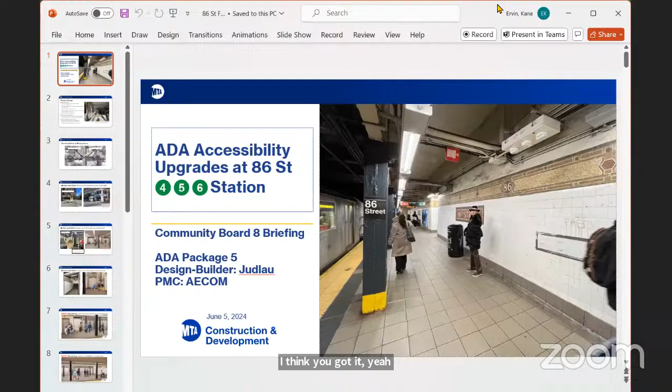Okay, can people see that? Oh, wait, sorry. Kana, if you want to email it to me, or if one of your other team members wants to share it, we can do that as well. Okay, I think that I got it this time. I think you got it. Yeah. Suffer from having too many things open at once, just my usual problem. Okay.

Okay, can you see the full presentation? Yes. Okay, great, wonderful, thank you so much for your time. Sorry about the tech problems.

Hello, my name is Kana Ervin. Thank you so much, Katerina, for the introduction, and thank you, everyone, for your time. I'm here representing MTA Construction and Development. We're very excited to come here with updates and a presentation about 86th Street.

This is a station in the ADA Package 5. This is the largest design build package that the MTA has awarded to date. We awarded this in December, and this builds on the success of our very first design build package of ADA upgrades that we completed earlier this year.

So we're at 4 stations and counting for this year, at 151 accessible stations. So the MTA is well on its way to meet our accessibility goals.

Just for some context, this station does have an elevator, but it is not yet fully accessible. So we're going to be doing a myriad of ADA improvements, as well as some other improvements here to bring this up to code and just make it an overall better station environment.

So we have to dive into the project scope. The ADA improvements include 1 new street to upper platform elevator serving the southbound platform. And we're also going to be installing 2 new upper to lower platform elevators serving both directions.

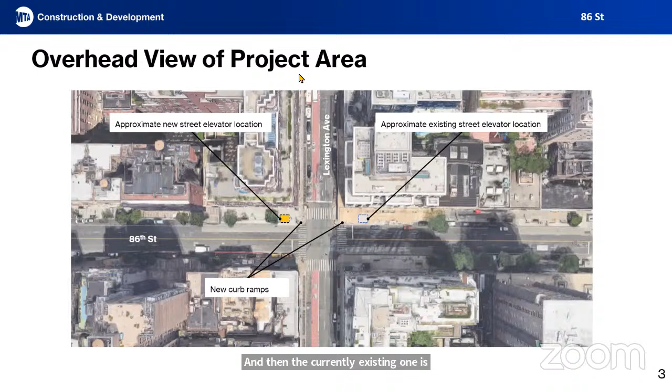We're just going to flip through some before and after photos, some nice renderings we have from the project team. So this is the street level. This is northwest corner of Lex and 86th. We have our landmark Best Buy here. That makes it easy to visualize where the elevator is going to be landing.

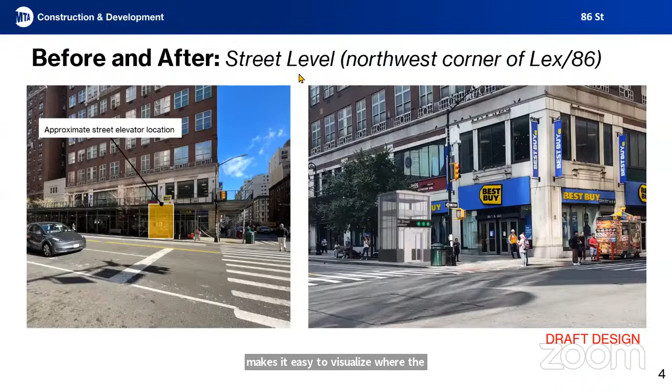And then we have this before and after view of the upper level. So this is the southbound direction. On the left-hand side, you can see that's one of those double staircases I was talking about. So that will be removed and reconstructed around the elevator. You can see how we're going to be doing that on the photo to the right.

We're going to be keeping the OMNY machines. We're just going to be shifting them a little bit. Again, these are renderings or draft designs, so if you don't see them in the photo, it doesn't mean I'm not going to be including those.

To the left, you can see that's where the approximate landing of the street to upper level elevator will be. And on the right, right where that man is coming from, that is where the station entrance is.

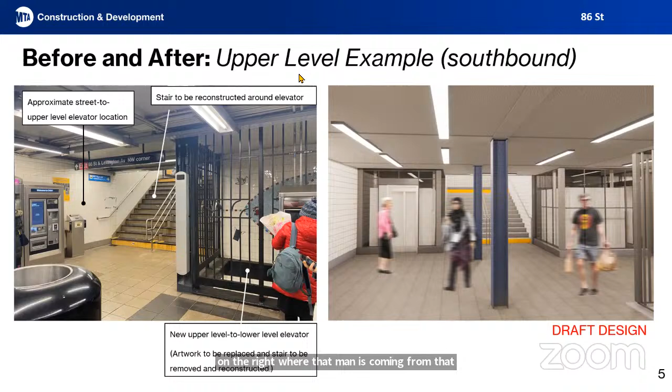Some more renderings. This is showing the lower level, and this mosaic banding is the historic feature I was talking about. So we're going to preserve that.

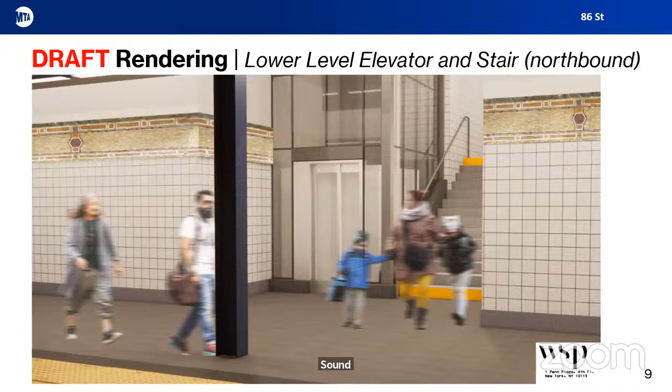This is the elevator and the stair northbound. And we have the southbound lower level elevator and stair.

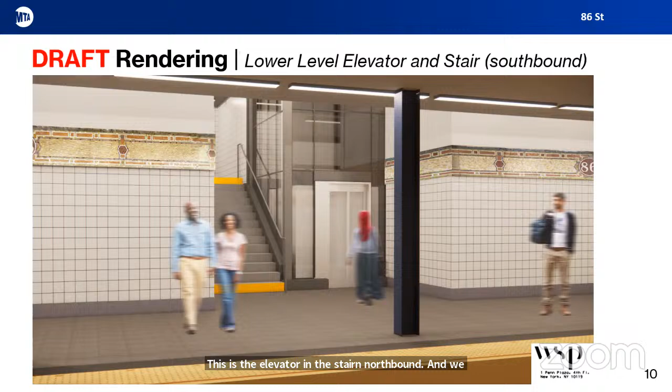Okay, so to go into the construction timeline, now that we've seen some photos of what it will look like, currently we're in the phase of doing outreach, making sure stakeholders are kept aware, coordinating with utility companies and with all the different agencies we work closely with at the city, DOT especially, and other agencies as needed.

This will be throughout the entire lifetime of the project. We are constantly coordinating with these different entities. The earliest we could be mobilizing is mid-June, but I'm going to address some asterisks on the slide and talk about why these dates are approximate.

The first visible signs of construction you might see are the barriers we install that maintain and protect traffic - we call them MPT. They surround the work zone, and then we set up a staging area, which is the construction equipment we'll be placing there to support the project.

After we put up those barriers, we're going to commence with the utility work, excavation, demo, and other construction work. That will continue from right after we install the barriers until the end of the project, which is slated to be substantially complete in Q4 2026.

To address these dates - this is the earliest we think we would do this. We wanted to come to you even though these dates are approximate and we think they might move a little bit. The reason we don't have them set in stone yet goes back to that first slide I was talking about, this being a design build package.

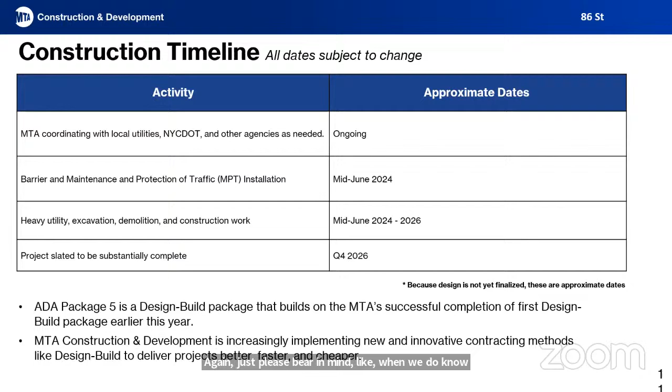We will come to you when we have more concrete dates. Later in this presentation, when we talk about some of the service disruptions, please bear in mind that when we know the exact weekends affected, we will let everyone know. We just wanted to err on the side of caution and let you know the very soonest we could do this, and to start the communication on this project.

So now we're going to dive into the phases of MPT that I was talking about on the earlier slide. This is the first one - supporting utility relocation, some station modifications, and this phase is for the southbound elevator installation and the platform extension that accompanies the elevator.

Because of that realignment, we'll have to temporarily remove the taxi stand - just for this phase. However, the M86 bus stop will be maintained, as well as all the pedestrian ramps and walkways at all times.

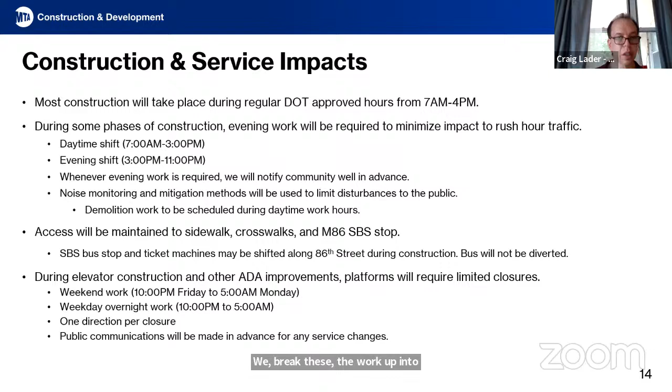We break the work up into shifts. If there is work that can be noisier, because we do have some excavation as we're going to be punching up through the station, and the Manhattan schist is one of the strongest rocks on Earth apparently - I just learned that at a construction site - we always make sure to stack some of the noisier work during the daytime, and we have a bunch of mitigations to reduce the noise.

We can use sound blankets, we use enclosures in some cases, but that still needs to be finalized. When we have the design, we'll let everyone know what our exact plan is. I know that is going to be very important, especially to this neighborhood, very residential, of course.

The evening shift, that's 3 to 11, is most commonly used to prepare for the next day. That means cleanup, any sort of prep work, but we are not going to be doing any sort of rock demo during the nighttime.

Again, that access will be maintained to the sidewalk, crosswalks, and the bus stops. We may have to shift the ticket machines in the bus stops just a little bit on 86th Street during construction. We're still in contact with New York City Transit and our bus division there. It won't be diverted, it won't be skipped, but we are still in discussion with them. And of course, we wanted to give you that heads up in case we do have to do that.

So during the construction of the elevator, and specifically the platform level improvements I was talking about, most notably the ADA raised boarding areas and the platform tactile edge yellow strips, those will require some limited platform closures, and we do one direction at a time, because we're never going to be shutting down the station fully during construction at all.

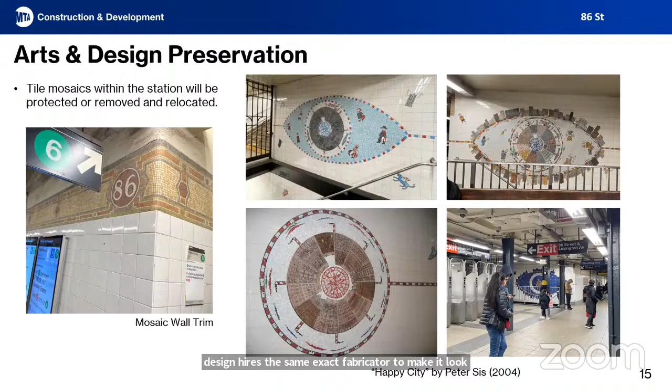We work very closely, I facilitate conversations with the arts and design team at the MTA, and Katerina, and we also loop in the contractor. They work hand in hand with arts and design to make sure that these beautiful artworks, which will be disturbed in some capacity, especially that blue eye we see in one of the renderings that will be moved to make way for one of the elevator banks, will be refabricated. Most commonly, arts and design hires the same exact fabricator to make it look exactly the same, and we will be relocating it somewhere in the mezzanine. That goes for all the artwork that will be disturbed.

And finally, we have our project team contacts. You all know and love Katerina, of course, and again, my name is Kana Ervin. There are some familiar faces on this Zoom, I see Michelle and Will, so hello, and you have my contact information. We also have Deborah House, and we have folks from AECOM and Judlau on the call as well who can answer some technical questions.

Please feel free to take photos or screenshots of the hotline and the email. Please just note that the hotline is not for emergencies, but if any member of the public wants to call and ask questions, they can do so. If we don't get you in the moment, leave a voicemail and the PMC team will get back to you within about 24 hours during the week.

And that concludes our presentation. We can now open it up to questions. I will turn it back to Katerina.

Thank you so much, Kana, thank you for taking us through that. And thank you everyone again for your time and for giving us the time to present this to you. So we can start taking some questions. Let's start with Valerie. But hold it. Oh, sorry, go ahead, the questions, Katerina. Got it, you throw it back to us.

Okay, thank you for the presentation. First, we want to see if any members of the public would like to be heard on this, and I see Elaine Walsh. Why don't we unmute Elaine? And I'll remind everybody, if you'd like to ask a question or make a comment, go to the react icon on your device and look for the raise hand button so that Chuck can call on you.

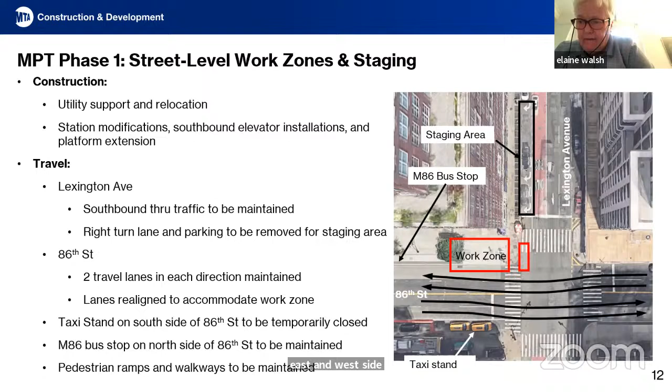The south side with the entrances, on both the east and west side of Lexington Avenue, we have subway entrances there. Are you going to renovate those? There's a lot of things we're doing. I think, Chris, I'll turn it over to you.

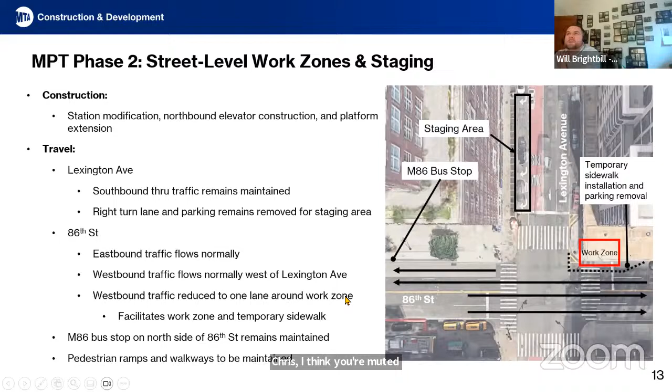Chris, I think you're muted. Chris is, there we go. Found him. Oh, okay, sorry, he's not labeled as anything other than just his name. Oh, Chris Alexander, yeah, sorry. Sorry about that, I was trying to unmute and it said I wasn't allowed to.

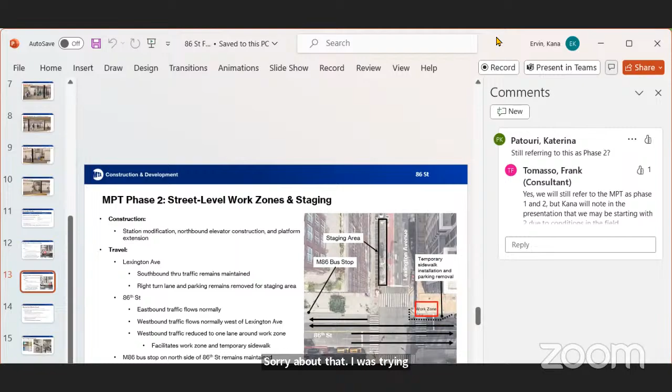Yep, there will be two staircases, I forget exactly which ones, that will be upgraded to ADA standards. So the rise and run of the treads will be renovated to ensure that they are at the proper ADA height, as well as the handrail elevation will also be modified to ensure that is per ADA code standards.

Okay, we also know that there's a lot of asbestos in the subway, and will you be doing the repainting of both the north side and the south side and retiling?

And yeah, you guys won't be able to unmute yourself once I unmute you and you mute yourself back, so just stay unmuted, sorry about that possibly. Can, sorry, I'm so used to muting and unmuting.

It's okay. We don't intend on impacting any locations that are not directly impacted by our construction. The painted surfaces are not asbestos containing, but they are lead containing, so we will have proper lead protection when that occurs. The MTA has done an extensive asbestos survey pre-bid, and we will be monitoring any locations where asbestos may be interrupted, so that the proper abatement takes place. The MTA has a third-party subcontractor who performs that work.

So we have addressed any areas that may be of concern, and we are working with the MTA C&D to ensure that those areas do get abated in advance and in the proper standards.

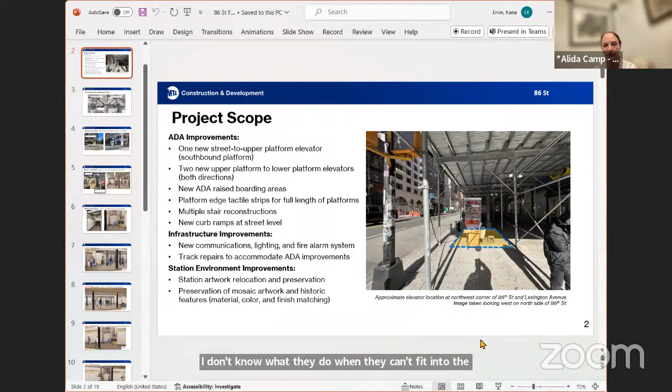Yeah, that's the problem - if you shift it 50 feet and you have all of those buses trying to use an even smaller space, it will cause problems with buses. I don't know what they do when they can't fit into the space, but there's timings for the jitneys, the express buses, and the regular MTA buses. So I'm just raising that because it can get really crowded there.

My last point is that the art by Peter Sis, one of my favorite children's book writers, is fantastic, as you pointed out. I'm glad it will be preserved and moved, but I would encourage the MTA, if possible, to consider other art. I know plenty of stations have a huge amount of art, and CB8 has an arts committee, so we're fully in support of public art in public spaces. That's all.

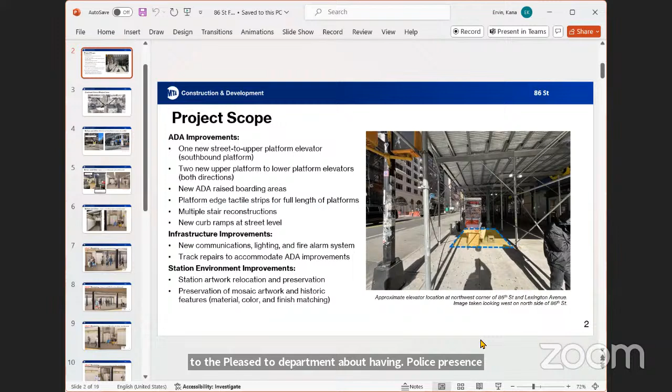So we do have regular liaisons that work with the NYPD to station officers throughout on platforms. I don't know if there's specific plans to have them here for construction. There are times that we specifically have NYPD officers on site at the street level to help with maintaining pedestrian safety, but there are NYPD liaisons and officers kind of going throughout the system regularly.

And second question - I worked on the 2nd Avenue subway with the MTA, and the elevators have been really maintained beautifully. 86th Street and Lexington Avenue gets a lot more traffic. How do you plan to maintain the cleanliness of the elevator?

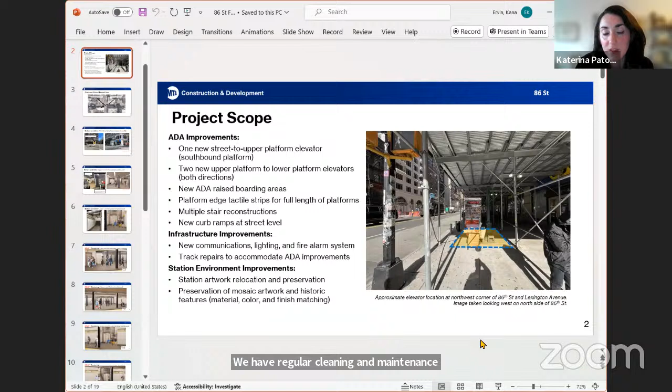Yeah, this is a high traffic station, as you know, it's important to our system. We have regular cleaning and maintenance schedules specific to the elevators in general and elevator cabs. Our station managers check those routinely, especially during the night shifts. That plan is regularly followed daily by supervisors and will be the same for these new elevators as well. We want to maintain all new infrastructure and existing infrastructure to make sure it can run for the whole length of its useful life - that's something our station managers take really seriously.

Thank you. Appreciate the 72nd Street kudos - I was actually on that project, I built it earlier in my career.

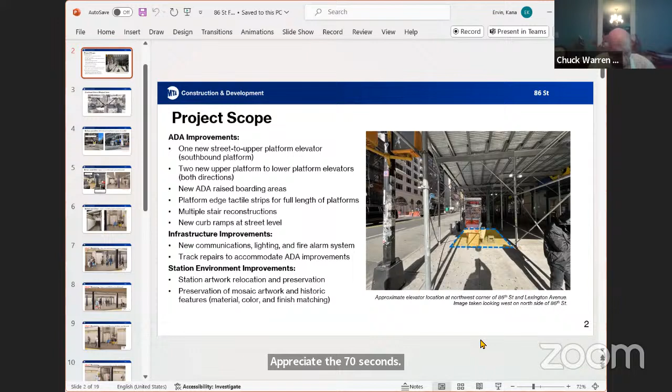And thank you, MTA. We're all in the area and everywhere really delighted that this is finally happening. It's very much needed, so thank you very much. A couple of questions about the construction.

Number one, at any time, will you need to actually break open the sidewalk or the street in order to move wires or whatever you might need to do?

Chris? Yeah, I'm not sure what the question is.

We have to modify the existing station infrastructure and provide a shaft from the mezzanine level to the street. There will be a need for excavation on both sides of the intersection to accommodate the structural steel and shaft modifications, so the elevator can travel from street to mezzanine level. Because you had that north side as a staging area, I'm differentiating between the sidewalk and the street.

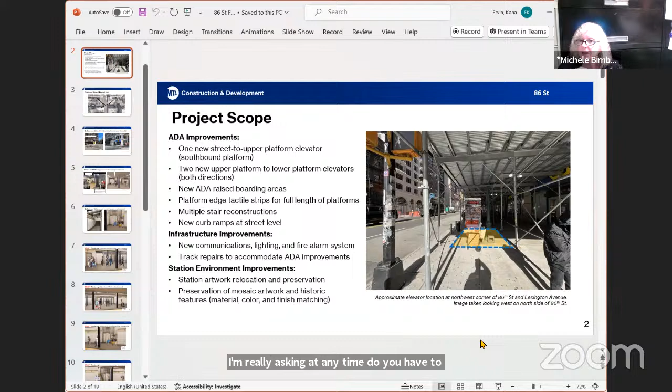If you're breaking up the street, will it be within that fenced off staging area? I'm really asking, at any time, do you have to close the westbound lanes? Could we go to that slide while we answer this? I saw how you made a little veer off in order to get around the staging area, so I'm asking if that's the extent of it, those two westbound arrows, so that the breaking of the street will be within your staging area and traffic will always be left open.

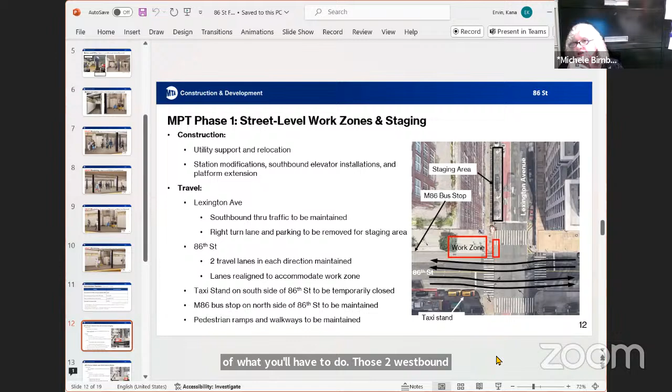During this phase, the two lanes in both directions are maintained throughout. In phase 2, the travel lane heading westbound will be narrowed down to one only through the intersection. Connor, if you can switch over to the next slide.

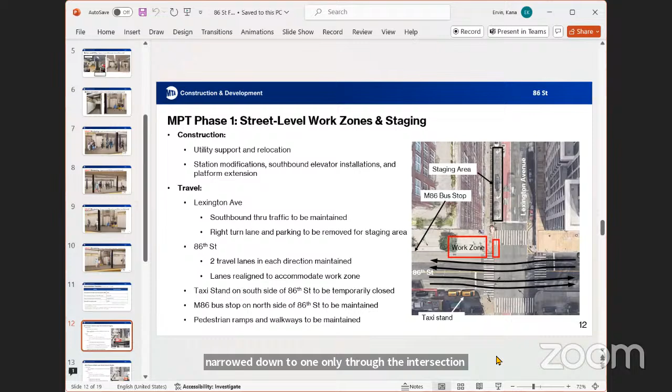To accommodate pedestrian flow and to ensure that the intersection and the sidewalk is maintained, the traffic heading west will be narrowed to one lane, but restored after the intersection.

So it'll only be one lane east of Lexington Avenue, and after you cross Lexington going west, it'll become two lanes again. But those lanes will curve or veer a bit to go around your work area, correct? Correct. There'll be a merge east of the work zone, within the block, and then the street will reopen back to two lanes of travel. So there will be a small bottleneck at this area, but only during the second stage.

Just to make sure this is clear in response to your question, the excavation is happening in the work zones and not in the staging area. That's correct. Yes, that is correct.

Now are you using jackhammers or blasting? How are you doing your demolition? No blasting - it's not a method that we're allowed to use, and it's not a method we want to use, especially close to so many residential and business areas.

The main methodology we're intending to use is rock drilling and splitting, with some jackhammering to break up loose debris. That is what we are currently looking into and what we plan to use. So essentially during the daytime hours, we would be drilling, splitting rock, and doing some light demolition to clear the Manhattan schist when needed or where needed.

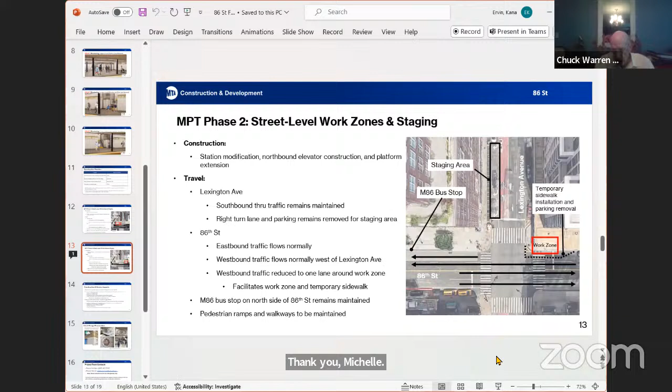Excellent. Thank you, Chuck, and a big thank you to the MTA for the presentation. Really appreciate it. The costs of these construction projects can be very large, and each dollar we spend on an individual project is a dollar we can't spend on another project somewhere else in the system. Is there anything you could do to reduce the cost of this project so that we can stretch our dollars further across the system? I mean, the project has already been awarded, but design build is the new innovative contracting method that construction and development is using, and it actually gets us a lot of elevators for a reduced cost rather than our traditional means of contracting. So this is in itself a cost containment measure.

Yeah, I think that's a good question. I don't know, Sebastian, if you caught the beginning where Kana broke down in more detail the nature of this design build package, but that's exactly why we're trying these new methods of contracting in order to meet that goal.

The other thing to add is that as we bid for these projects from the construction side, we compete against our competitors to provide the lowest price, finding alternate schemes to lower cost, saving on schedule, and mitigating other cost-impacting factors throughout the construction process. The bidding process itself is tedious for us, but it gets the best bang for the buck, and it also mitigates our exposure to change orders, where under the previous system, any errors would provide the contractor with additional change orders.

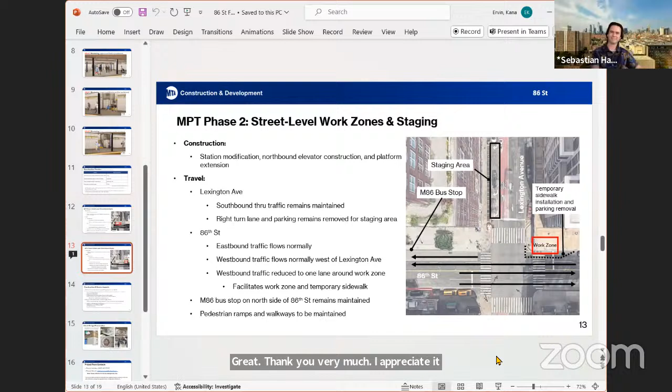Great, thank you very much. I appreciate it, thanks Sebastian. Right, Chuck, before we go to Rita, I would like to just chime in. Of course, anytime, all right.

I too would like to thank the MTA for this presentation. As you know, Community Board 8 had some very strong language in our resolutions when you came to us with the northbound local accessibility improvements back probably 8 years ago or so. We were all very frustrated that it was only on that single platform and that it wasn't being done comprehensively, so we're really happy to see our community board was hopefully influential in moving this project along and getting the MTA's attention that this should be and was a priority project. We'd like to thank you for that.

There was a comment made about the phasing in terms of when you may be able to start operating the elevators. To my original point, remember that original project was done so people would be able to access the northbound local platform only, and they would not be able to return to the subway. So along those same lines, I think the sooner we're able to get any elevators in place, the better, even if it means providing full accessibility on the northbound side before anything happens on the southbound side, or only getting local access on the southbound side before connecting to the express platform. I think that should be a priority, and I would again ask if that could be considered.

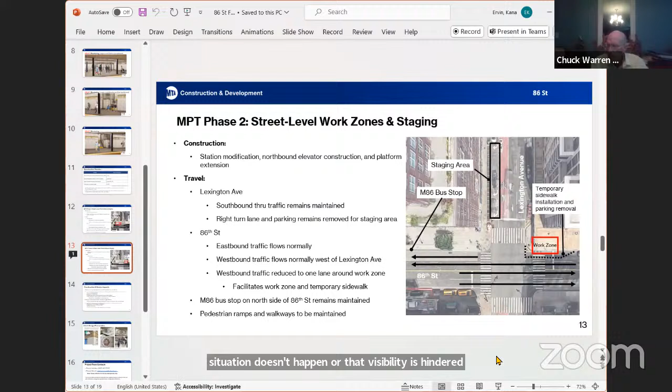Okay, I'm glad to hear that. Again, I would still request that you look into possibly moving it back as well to provide that additional visibility, but I am pleased to hear that you do have those precautions being taken and that is now hopefully part of your standard process for these. I just want to go back to that again, the same location.

Given the situation, I don't know if there's any consideration that could be given to perhaps eliminating the right turn lane temporarily from southbound Lexington onto 86th Street, for the purposes of preventing potential interactions with pedestrians, especially when you have a staging area over there. So I'd like to put that in as something to consider as well.

We're still coordinating and working with DOT. Just because the staging area is currently in that lane doesn't mean that DOT will cancel the turning lane. The turning lane may be shifted into the bus-only lane at the time, but we're still working with the MTA and DOT to finalize that intersection configuration.

Yeah, and at least in my opinion, I would not like to see the bus lane compromised. If we could then go back to the question of pedestrian access.

So you had mentioned that the southbound staircase will need to be closed for a period of time during the construction. Are you referring to the entrance on Lexington Avenue, the entrance on 86th Street, or both?

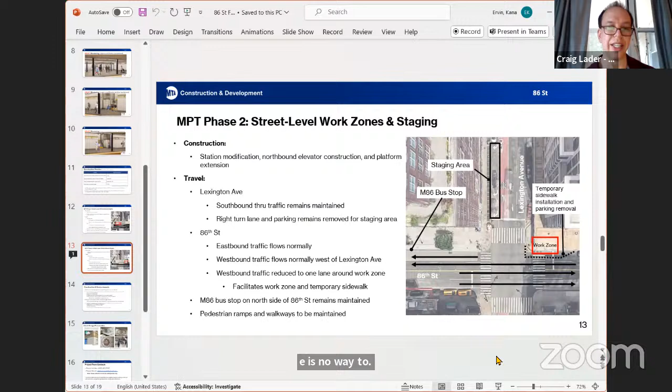All right, and there is no way to allow for the Lexington portion of it to remain active?

Unfortunately, if you go back earlier in the presentation where the schematics were shared, that existing staircase is actually being shifted over, so that wall is... Oh, okay. The elevator actually goes through half the stair, but the stair width is maintained, so the entire stair shifts over. So there's actually quite a bit of structural reframing required to maintain that width of staircase, but also provide access and the elevator. This is actually the slide.

That elevator is about 10 feet wide, so it eats up about half of that existing staircase. So the wall where the artwork is, which is going to be relocated and moved over, has to be reconstructed to accommodate the elevator-staircase combo.

Okay, no, that makes sense. Again, I would go back to the concerns that were raised about maintaining crowd control, because if the southbound access is only going to be on the south side of 86th Street, that's a single staircase similar to what you're showing there, so essentially capacity is going to be reduced by half, and it already does get crowded at times.

So I would hope that there is strong crowd control. There is strong crowd control that is in place.

Same thing, just to make sure I understand, the internal staircases as well, I assume those are going to have to be closed while the elevators between the local and express platforms are installed, correct?

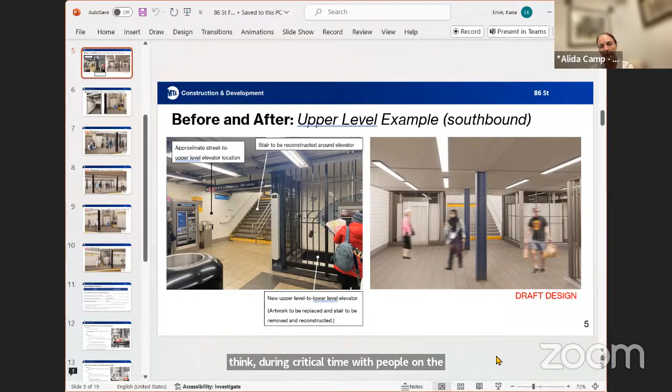I did. I just wanted to reiterate, and please forgive me for taking up the time, the idea of crowd control. I use that station at rush hour, I use it on the weekends, and it is always crowded with all the assortments of things that people have, plus all of the people with the crosstown buses, express buses, and limited buses. I don't know if you're planning to have cameras or MTA officials there, but we really need some help during critical times with people on the staircases. There's not a lot of room for people going both up and down, both internally and up to the street level, as well as the platforms. That's all, thank you very much for letting me speak on that point.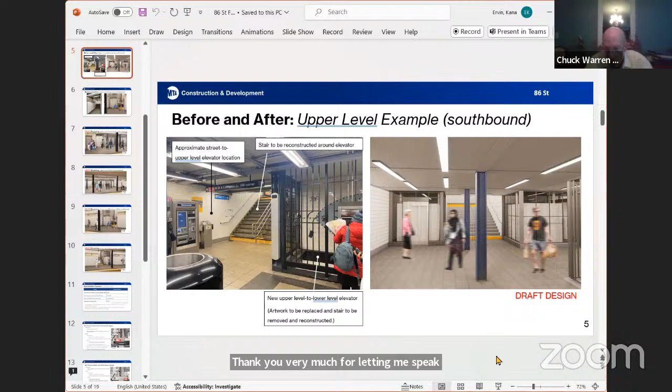Thanks, Alita. Just to note that we're going to take these notes back in terms of how we're managing crowds and wayfinding and all of that. We have our stations team and operations team studying these things very closely, so we're going to take all of this feedback back to them. Thank you everyone for your time and for all of your helpful questions and comments on this.

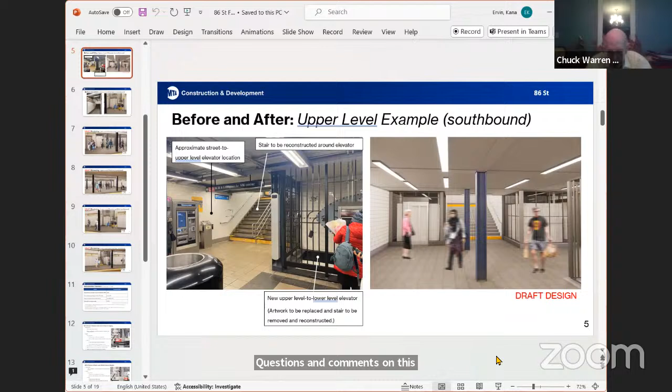I appreciate it. Okay, so why don't we take a vote on this?

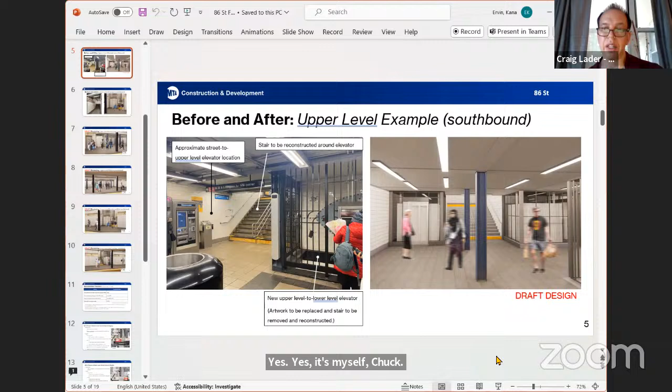Let me just read the roll, Craig, to see who's here. Yes, so we have everybody: myself, Chuck, Alita, Barbara, Gail, John McClement, Lori, Michelle, Paul, Rita, Sebastian, Valerie. Did I miss anyone who is a member of CB8?

Okay, so if you want to vote yes, you don't have to do anything. If you want to vote no or abstain or not voting for cause, please raise your hand. I don't see anyone, do you see anyone? So I think that's unanimous, and we thank the MTA.

And I know this is something, as Craig said, that we wanted to see happen for a long time, and it's great to see it being implemented on a reasonable schedule. I think we have, if the MTA folks can stay on, we could—because item 4, Craig mentioned before, it was a continued discussion on the proposed 96th Street bus lane, and we had some discussion of it before, and I think we're going to have further discussion here. Craig, did you want to speed that up a little bit?

Yes, and from the MTA side, New York City Transit, I don't think everyone is needed. I think Katerina, you may want to stick around for this. And Colleen, I know that you were the one who reached out and said that there was a request for a resolution in regards to the 96th Street bus lane improvement project. So I just want to revisit that discussion so we could hopefully come to a conclusion of it. I don't know, Katerina or Colleen, if you want to comment on anything involving that process, or anyone else from the MTA or New York City DOT.

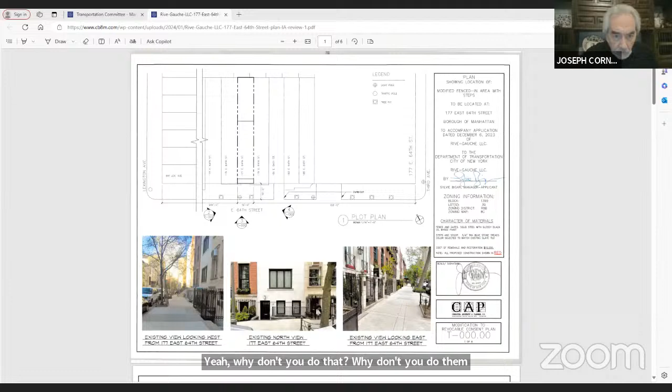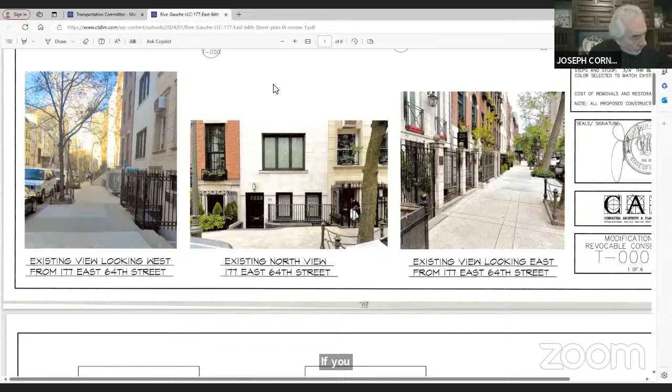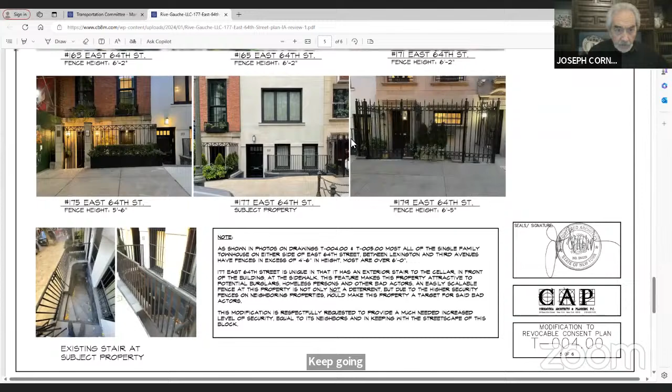Okay, I don't know if that's possible to enlarge. Perhaps you could go, okay, that's it. What would you like me to show? If you could go to the drawing T004. You're going to have to give me pages and keep going. That's the one, okay, T004. If you could raise that up a little bit to see the entire page. Yeah, okay, that's good right there.

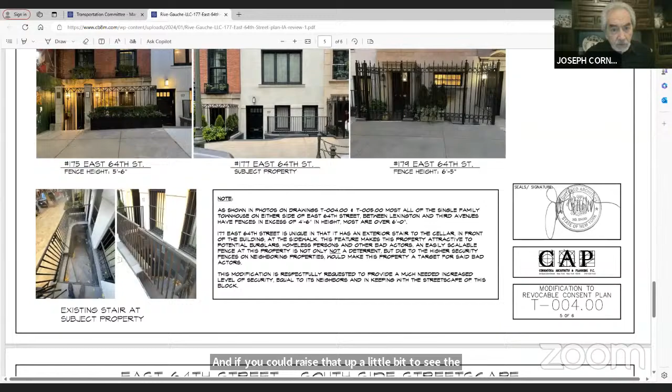So the building has this stairway that goes down to the cellar in front of it, and so we need to enclose it. Every house on this block that has a fence has one that's 5 or 6 feet high. These photos show almost a panoramic view of the street, the nature of the streetscape, the height of each fence along the street. When you come to this house, which needs a higher fence, it's like a broken tooth, it has just a tiny little fence.

So we're proposing, if we could flip to one of the pages, say page number 2. Yeah, that's fine. So this is the existing facade as it exists. You can see that on the properties on either side, there's a large tall fence here and a tall fence here. What we're proposing is to bring that fence to a moderate height, not quite as high as the fence next to it, but to the height of the lower side, to be able to enclose that stair.

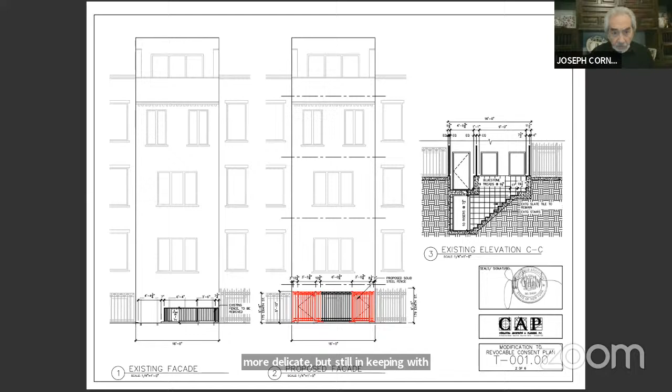Is any of the fence going beyond where your fences are now? No, actually the fences that are there now - and I'm sorry this is so small - but they're in line with the fences that are there now. The consent that was approved would put these fences in line with these other fences on either side. Those adjacent fences are forward of the property line.

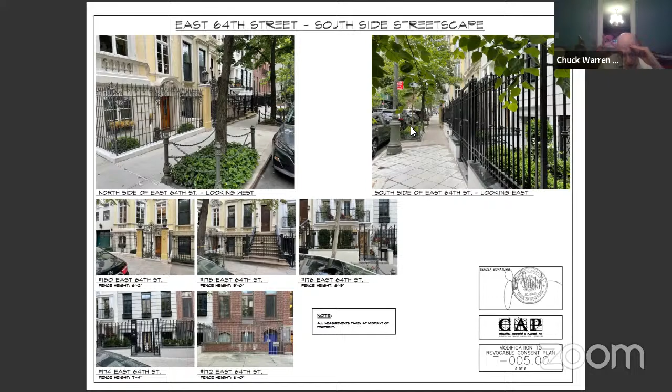Okay, so let me see if I understand this - the fence isn't going to project any further, but by that door it's actually going to go in some from within the property line and then come back out. That's correct. At the center of it, if you see this particular one, everything in red is in front of the property line, the black part of the fence is within the property line. Right, but none of it goes beyond what has previously been approved, basically? That's correct, it doesn't encroach any further than was already approved. And certainly not any further than the adjacent fences on either side. Gotcha.

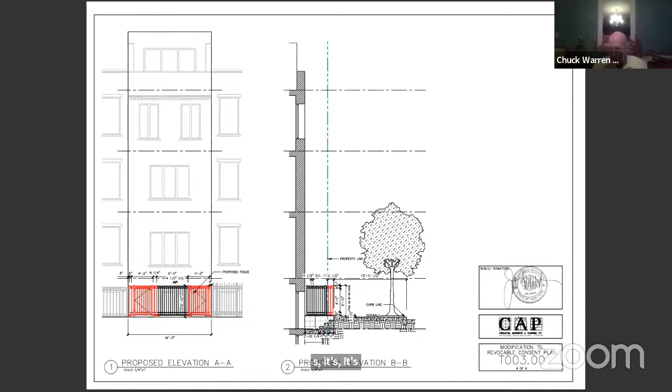Anything else? Well, that's it. It's a pretty simple modification, but I think an important one both for the street and for the occupants.

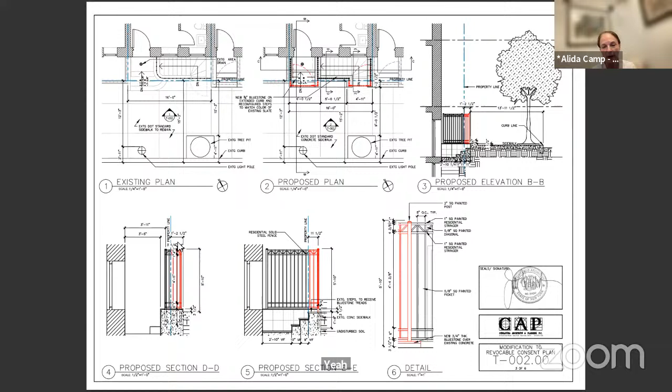So how far beyond the property line? Let me just ask you, how far beyond the property line are those fences? One foot two inches. Okay, so you want to move it out onto the public sidewalk, one foot two inches, in order to maintain a line with the adjacent properties. Is that right? That's correct.

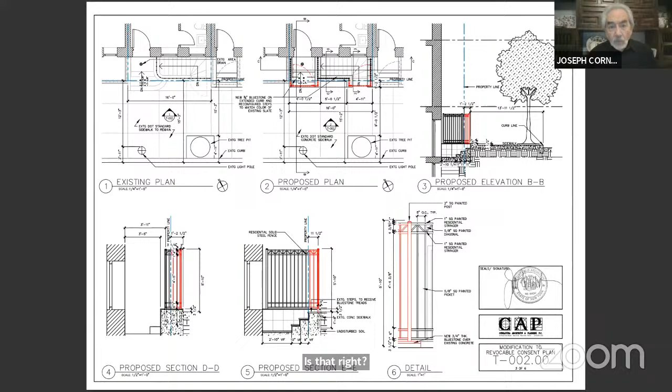And the existing revocable consent allows that. What we're proposing to do is to now make the fences the same height or a similar height to the ones on either side and throughout the neighborhood, actually.

Thank you for clarifying. I'm really opposed to this because A, you want to push something out onto the sidewalk, and B, you want to create more of a fortress feel on the block. These fences and gates create a feeling of a barricade, as other people have expressed. They close off the street. It becomes a street that is not as welcoming and inviting to the public, to the pedestrians on the street, while everyone is barricaded behind these fences in their homes.

Certainly there are locks that exist that should protect the basement door from anyone who wants to come in, as every other building in the city of New York has. It creates a feeling that's very off-putting to see fence after fence, and even more importantly, gate after gate after gate. It suggests that there is an enclave of people who are barricaded from the riffraff on the sidewalks, and I really object to that.

The sidewalks belong to the public, and there should be a feeling of invitation to use the sidewalks, to be able to admire the homes and the windows and the architecture, and not to feel a stranger or to feel that you are not invited because homes are barricaded. Six feet is tall.

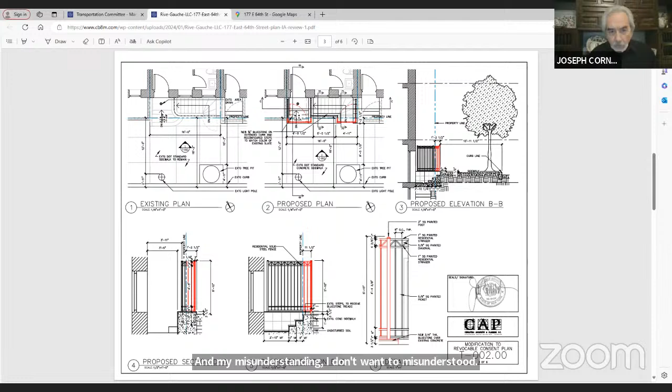That's correct, but the streetscape that's there now—and I'm not disagreeing with what you're saying, but it already exists. And none of the other houses have stairs accessible from the sidewalk that go down into the cellars. This particular house has that.

I appreciate their interest in it, but I think given one family's interest and the interest of everyone else in the city and all of our visitors, to me, I don't accept it. I'm sorry, I just don't. That the entire street is barricaded and blocked off by fences and gates is not an excuse to do it on yet another house.

It does create a very off-putting environment. It's not a welcoming street. There are towns on Long Island that do that, and for me it's just not pleasant to be there. New York City is a paradise of access and walkability, but that makes it somewhat less pleasant. And so I can't approve it. I'm done. Thank you very much for listening.

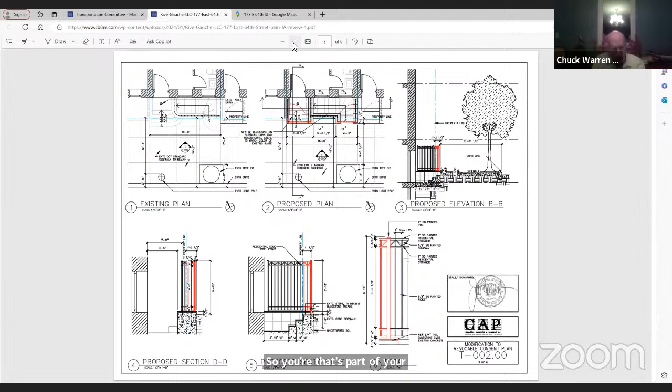You already have approval to do it, I assume, and the other ones don't go out at all past the property line. Is that correct? The one in front of the door.

No, the two in front of the door will come out to align with the adjacent fences. The center one, not red but in black, will be within the property line because it has to protect that stairwell or someone inside the fence from falling into the stairwell.

So what you're asking for is you've already got the consent to go out 1 foot 2 inches, right? You've got that, on either side, yeah. Essentially, but again, please—

The existing revocable consent already allows that fence to be out there. All we're saying is we're going to take the center of it, push it back, and then raise it up adjacent to the other fences.

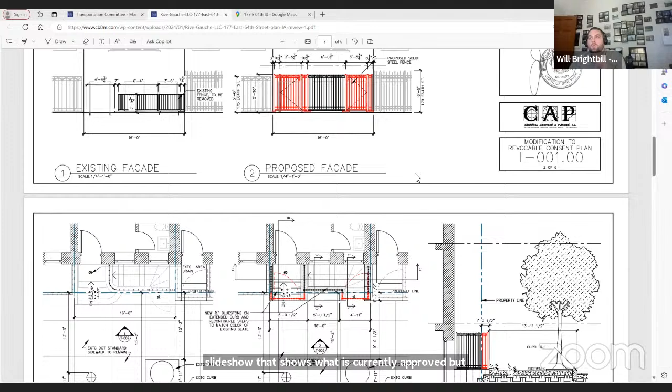All right, I just want to make clear what you're doing. Okay, Michele? Joseph, is there an image in the slideshow that shows what is currently approved but not currently built? I could send you the drawing of the initial. It's okay, no, I just want to make sure there wasn't something I could show.

Well, let me first say it's an insufficient presentation, and I think that's why it's unclear, and that's why we're having this difficulty. For me, if you go back, I see this is the current existing condition of this house, 177. This is what we're looking at now.

That's correct. And the cellar, where in that picture, in this actual photograph, are your two side fences that are one foot plus out into the sidewalk? Where is that? Can you zoom back just a little bit so we can see the adjacent fences?

Okay, here's probably the easiest place to see it. So now we're looking at the whole frontage of this house of 177. There is a door on the left. Right, and that's where there is no fence.

Then there is a setback fence, and that looks like it's going into an areaway as well, but perhaps I'm not seeing it correctly. That fence, I can explain it to you. That fence is above the stairway, and at the right side of that fence there is a gate that lets you down into that stairway.

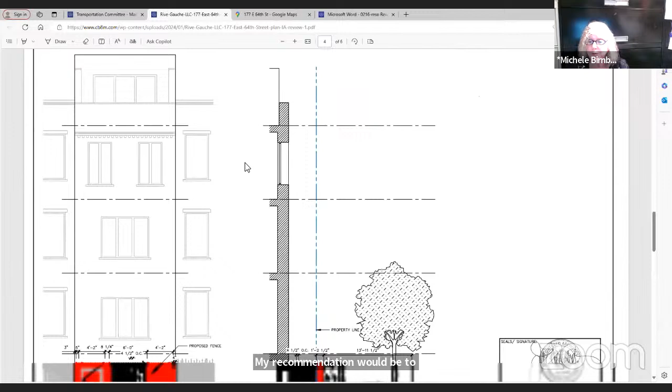My recommendation to this committee would be, I don't know if I can move to table since I've spoken, but maybe somebody else will. In a goodwill effort, I'd suggest the gentleman go back, get pictures of the aesthetics of the fence, find out what a 7-year-old revocable consent is, find out what the height limit is, and then bring this back so we can talk about it more intelligently.

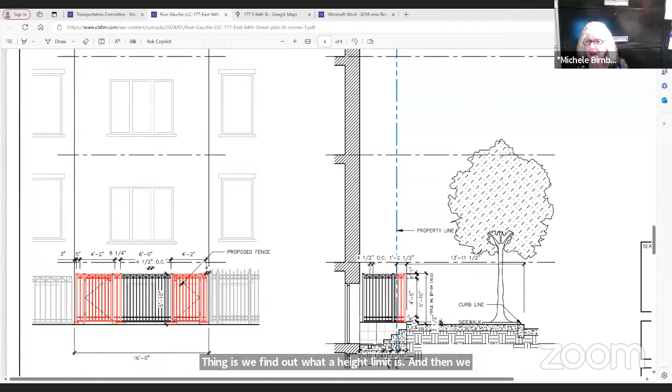The aesthetics of the fence is shown on the drawing on the page now. Can you enlarge that a little bit? So where's the aesthetic? Okay.

This is the fence to the west. That's an exact representation, that has been built. And this is the fence we're proposing, the one in black and red here. The fence to the east is right here, that's the exact representation of what they are.

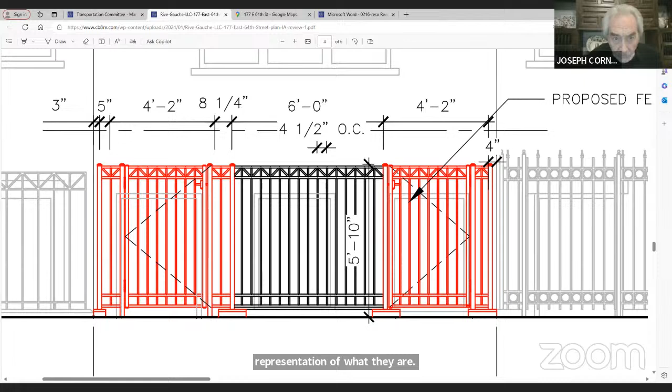The red, black, red is what you are proposing. That's correct. Okay, if you go off the page to the right, where you have spokes, what was that, what might that be? What is that?

That's somebody else's. That's next door, existing. Yes, it is, but it doesn't belong to you. It's somebody else's fence, correct? That's correct. Okay, well we're not talking about that. It's confusing the issue. Our issue now is whether what you're proposing is appropriate, whether the size is correct, and whether somehow that consent is still enforceable. So I'm not sure of any of it.

And in order to give this a fair shake, I'd like the gentleman to come back with thorough answers to all those questions and imagery to support it, perhaps also with the streetscape. Then we can go from there. But otherwise, in this form, with the information we have, I won't support it. So thank you.

Is there any time limit on this? I mean, there's no time limit, I assume. Do we, technically speaking, have a set period of time to respond to every revocable consent application sent to us? DOT is very accommodating about it, but usually the applicant needs to consent to extending the period of time.

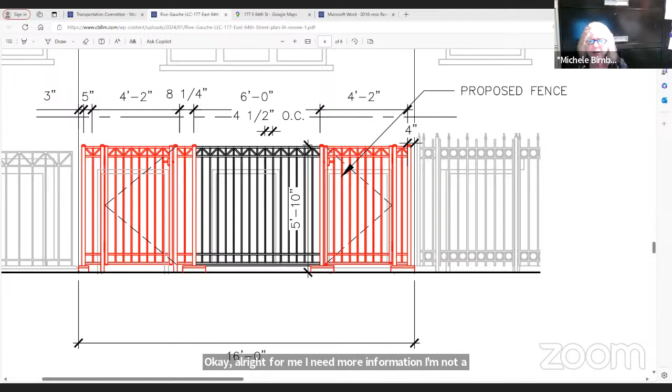Okay, all right. For me, I need more information. I'm not a fan of extensions. I understand the security concerns and the aesthetics, but for me it's not enough information. I'm going to vote no on it, if you take a vote, unless he's willing to come back.

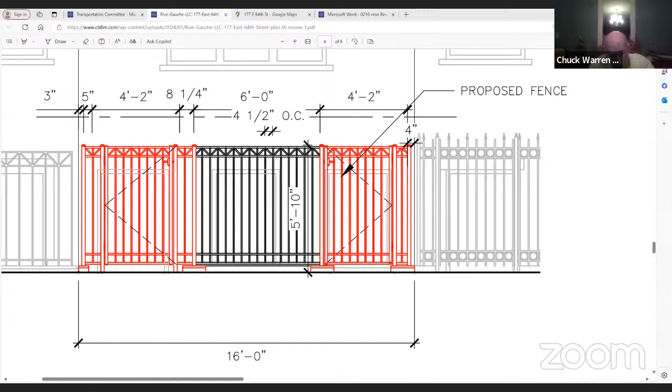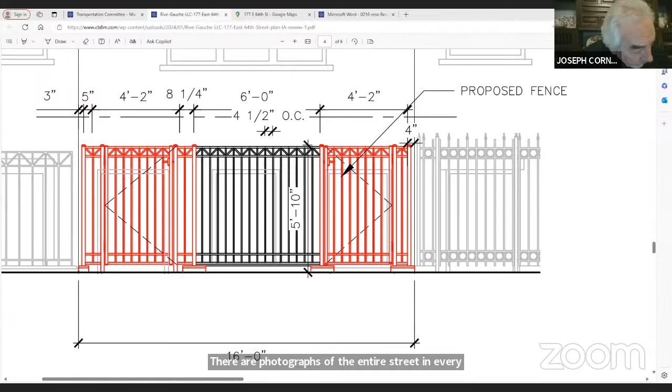Perhaps we can. The information is all here. There are photographs of the entire street in every house. I don't think that's the issue here. The issue is really that this house is an outlier, like it or not.

Every house on this street has got a high fence. Yes, but I don't know if there are height requirements, height limits on these fences. Just because something's been built doesn't mean it's compliant now or ever.

We can get some more information, and I think Michele's suggestion makes some sense, but it's up to you. I would say that generally the DOT would not refer us an application if it didn't comply with any regulations, like it being too tall. I'm sure you're right, but there are plan reviewers who review it before it's sent to us.

I believe that the existing consent went from 2017 to 2024. In any event, we'll put all that information together. I think that would be helpful. Good, thank you. And if you don't mind, please respond to the DOT plan team, just letting them know that you're accepting it being laid over to July, so that they're not expecting a response from us by the end of the month.

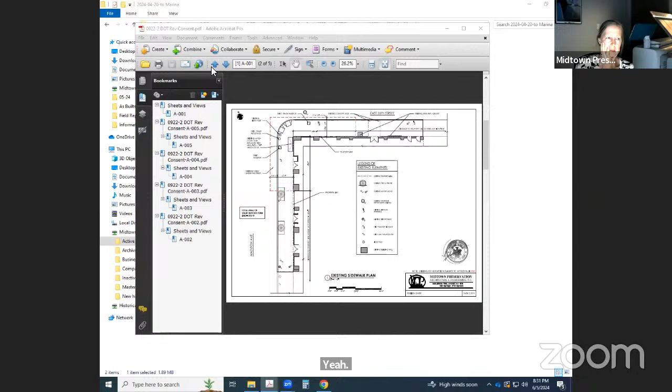I'm not quite sure if I need to share my screen or if you will pull up the submission package. Should I share my screen? It's much better if you're the one controlling what you want to show. Let me see if I can do that. Sharing your desktop, not the... sorry about that. I'm not sure I'm able to accomplish this. Well, it's up there, so you can see this. Yeah, we can see that, great, okay.

As I mentioned, I'm from Midtown Preservation Architecture and Engineering. What we're presenting here is really a portion of the property, below grade, which is a sidewalk vault that partially projects beyond the curb line. If you see in this drawing, the area outlined in red is below the roadway, and it's part of a cellar space that serves as storage area for the retail stores at the first floor. So the mission here is to rip up the asphalt, apply a waterproofing membrane to the existing vault structure, and then restore the asphalt. That is basically what we're looking for approval here.

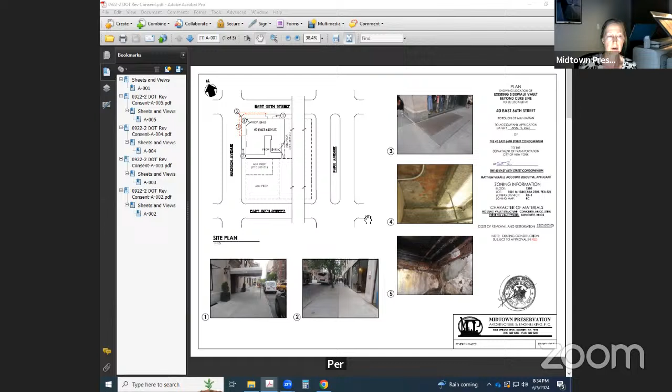I just want to mention that's part of the project, and it will be a standard concrete sidewalk replacement per landmarks and DOT regulations. What is the space used for? Underneath storage, did you say? Yes, the spaces are used by the commercial tenants for some storage of retail items, stock items. It's essentially a warehouse for the commercial tenants.

And how long is the work supposed to take, digging up the sidewalk and then fixing things? So the work is going to be phased so that the entrances can be maintained. I would say, I believe it was about maybe 3 months, but that's not specifically for the asphalt, that's the whole course of the project.

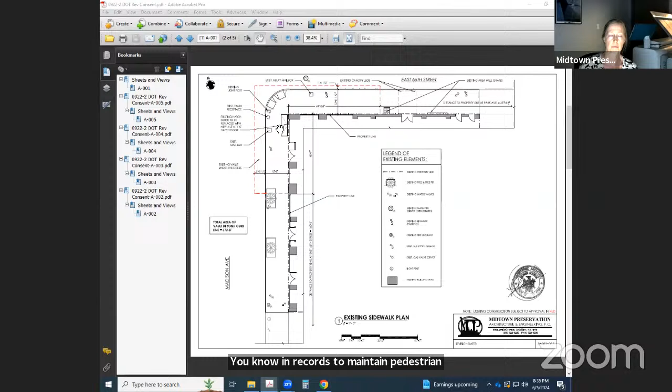Part of it will depend on the negotiations with the tenants, the best times that work with them. And that has to be further developed with the contractor, but it does need to be phased in accordance to maintain pedestrian traffic and partial roadway closures.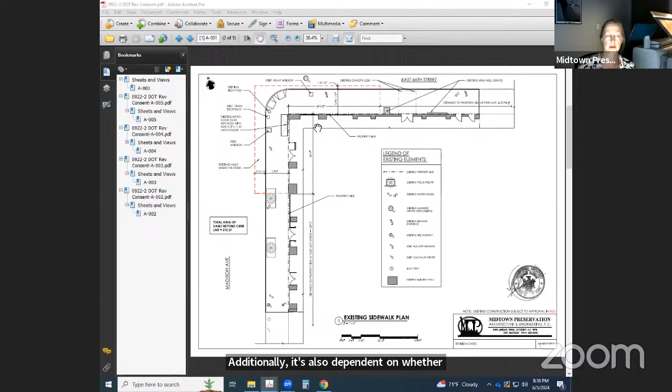Additionally, it's also dependent on weather. So depending on when we get the final DOT revocable consent approval and the various departments that relies on, like the bus division, etc., that completion date will affect the timeline of the project and the phasing of the project in an effort to complete the work during acceptable weather. Concrete can't really be done in the winter months. Ideally, we like to perform the work well before freezing temperatures.

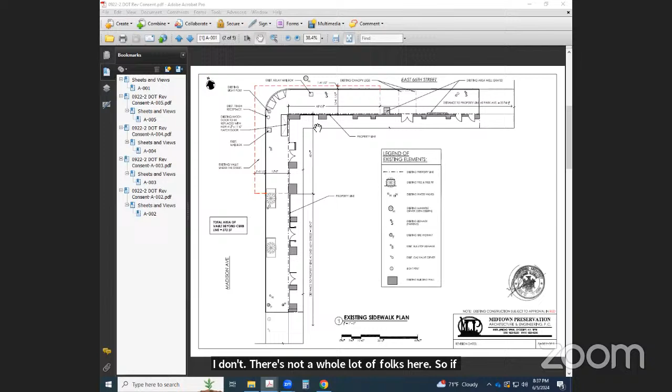Yeah, thank you. So I have questions that I think maybe Chuck can answer. But first, let me just ask this woman. Sorry, I don't see your name though. So there, Christina. Okay.

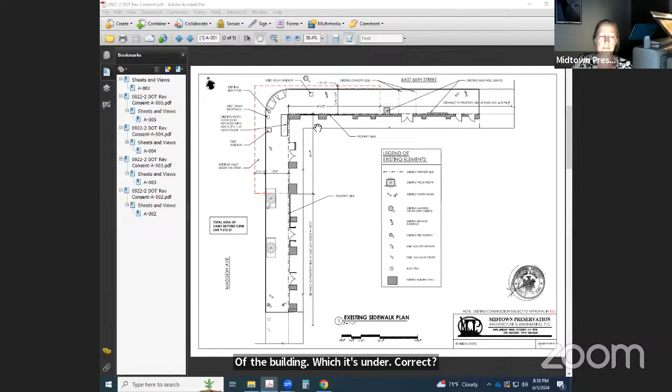So this vault is under the sidewalk, and you have access to it from the commercial property of the building which it's under. Correct? Correct. So once you're inside the stores, as you go towards the back of the stores, where their stock rooms are, they have stairs that go down to the cellar.

Okay. Additionally, there's a sidewalk hatch, but that's really for emergency egress. It's not typically used by the commercial spaces.

So you're not asking in any way to extend any structure on the sidewalk level past the property line. This is all work that affects the interior of the building, because if it's not properly maintained, you're getting flooding. Is that correct? Correct. Just because of the age of the structure, they're getting leaking to the interior. All the structure is pretty much existing.

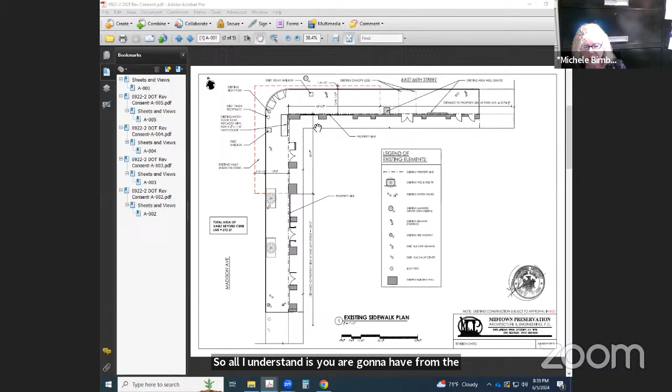So right, I understand. So all you're asking, I just want to make sure I understand, and then I have a question for Chuck or anybody else who can answer. So all I understand is you are going to have access from the interior of the building, and you're going to put a waterproof membrane. You're going to replace whatever needs to be replaced to prevent leaking. That's the repair that's going to be done internally.

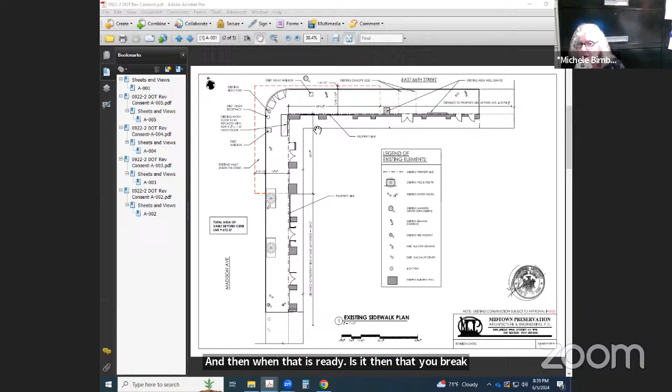And then when that is ready, is it then that you break the sidewalk, or does the sidewalk have to be broken when you do the entire repair? Right, so just to be clear, let me go back to this page here. If you look at this drawing, this red outline is where the curb is. And this area, even where this is squared off here, this whole area is covered with asphalt. Let me try to show the structure here.

So in order to install the waterproofing to stop the leaking into the vault, they have to rip up the asphalt and apply the waterproofing from the exterior. So the asphalt has to be ripped open through the whole project. It does, but they may not rip up both streets at the same time. So it may be 66th Street at one time, and then they'll do Madison Avenue at another time. It's going to depend on traffic and how the DOT allows the contractor to phase the job.

Okay, so I see that you have measurements here, but they're too small for me. So how many feet on 66th and how many feet on Madison? So it extends beyond the curb line 1 foot on 66th Street. And it extends beyond the curb line... I'm sorry, this might be an older drawing.

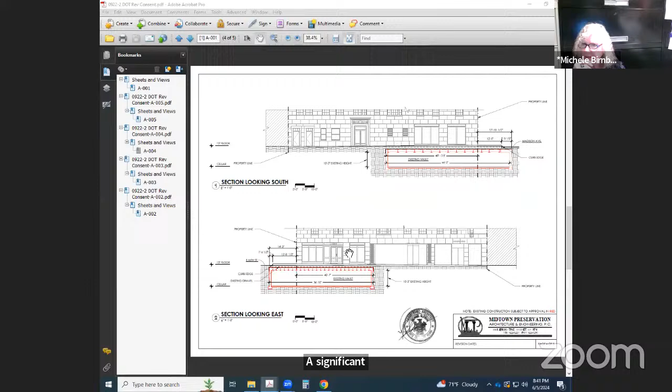5 foot 5.5 on Madison Avenue. So that's a lot of excavation. That's going to be a significant impact on the traffic on Madison because you're breaking up 5 feet, whereas on the other, it's 1 foot or whatever.

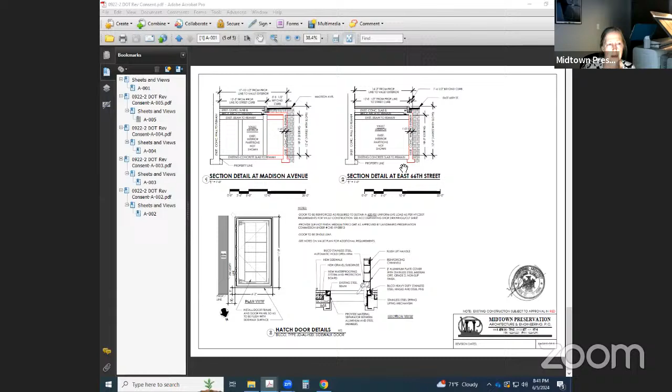In terms of excavation, it's not that far down from the top of the asphalt. I'd say at least maybe a foot of asphalt, maybe another foot of gravel. So in terms of excavating, it doesn't need to go out that far because the depth of the excavation determines how far out you have to go. And because it's the roof of the structure, we're not going down to the footing. Like here, this is the footing. We're not going all the way down to it.

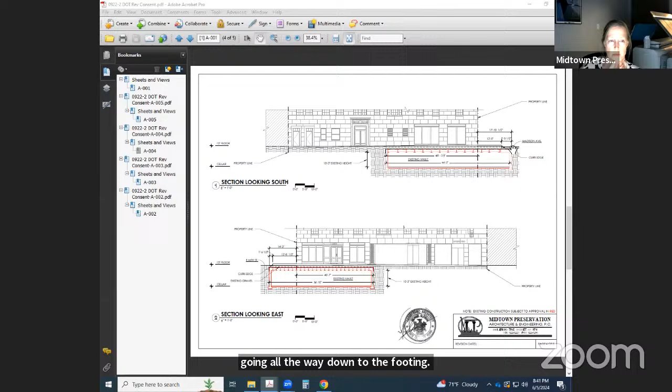I'm sure if I can zoom in. No, I understand. Yeah, I understand.

My next question - I'm not inclined to deny you the ability to repair. I don't think we want to see leakage. We don't want to see water cause a lot of damage. It'll undermine the integrity of the whole structure. So I'm inclined to support this.

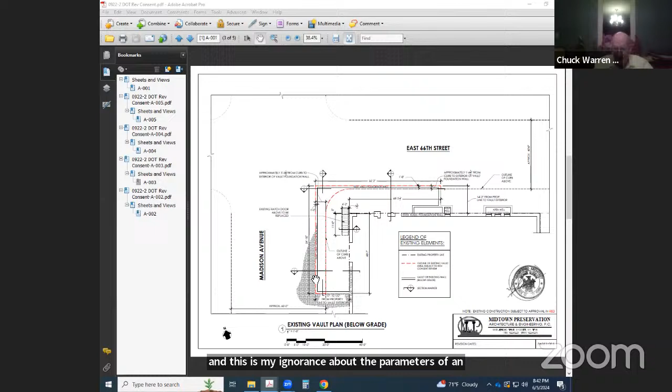What I don't understand, and this is my ignorance about the parameters of a revocable consent - I'm asking if Chuck can explain why this comes under that category. I think because they're doing something that goes beyond the property line, whether it's above or below ground, you have to get a revocable consent from DOT. Whether it's underground or - okay, I thought that only applied to... all right, that answers that question.

Underground, all right, okay, I got it. And at one point in time this area was not underneath the street, but when they made the streets wider, it became under the street. Decades ago the streets were narrower, so this was actually under a sidewalk, and then they made the streets wider. So now the asphalt is above the roof, if that makes sense.

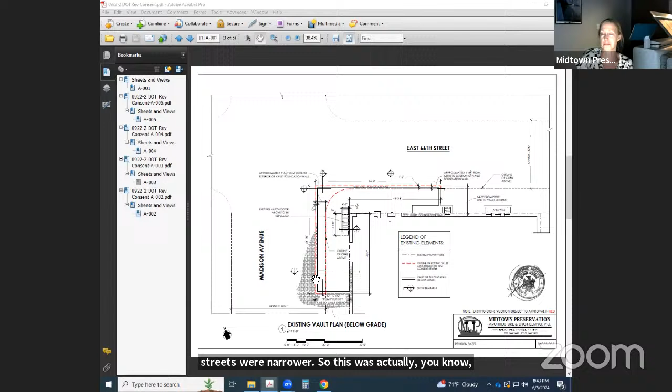So you have to break the sidewalk as well. We do, but because the sidewalk is within the line of the curb and it's not the asphalt, that's not subject to revocable consent review. Okay, all right, thank you very much, appreciate that.

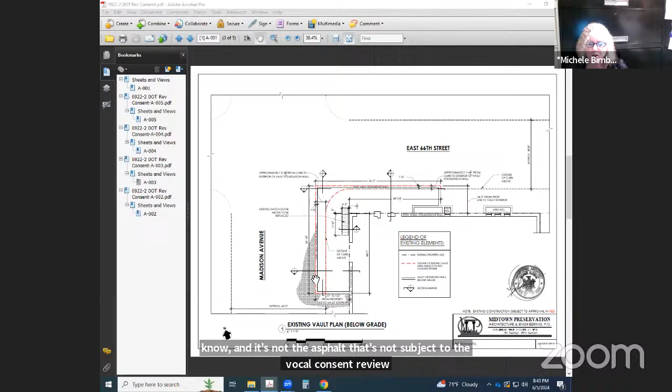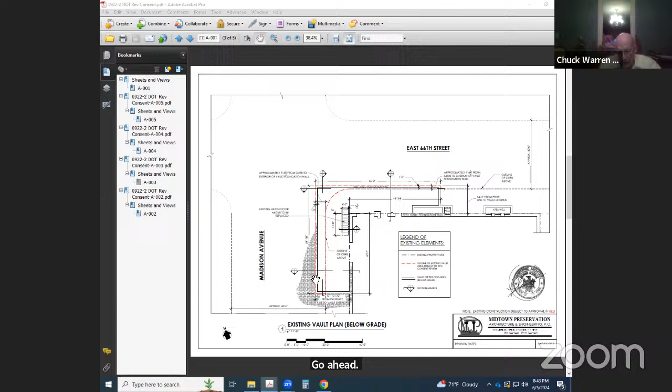I would just like to, if there is a second, see in the whereases that we clarify: whereas the applicant is working with DOT for the appropriate consideration of traffic impact, and so on. And Alita seconds. I don't know if that's the first, but...